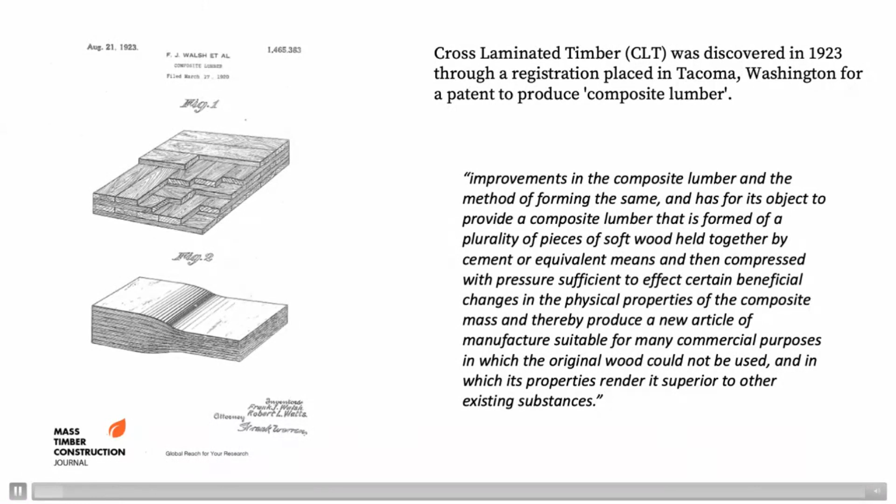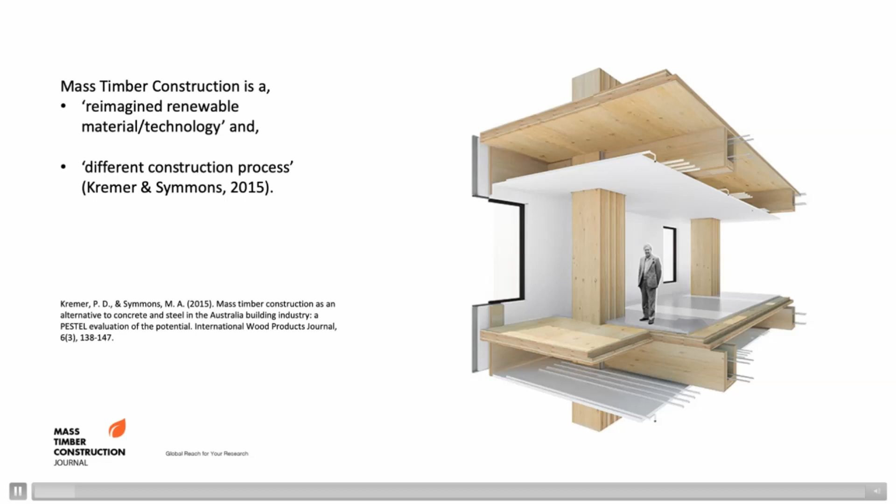More recently, we've moved away from being purist in our designs to hybrid systems. However, the genesis of mass timber is really around this renewable timber technology that then has this prefabricated process that wraps around it. And that's some of the great utility within the solution itself.

So there's three important numbers I want you to understand. They are 39, 28, and 11. And that is because building and construction is responsible for 39% of the carbon emissions around the world, with 28% of that being operational emissions. The remaining 11 comes from embodied carbon emissions. That's the carbon used in the production of the materials, construction, processing materials, concrete, steel, even mass timber products throughout the whole building life cycle.

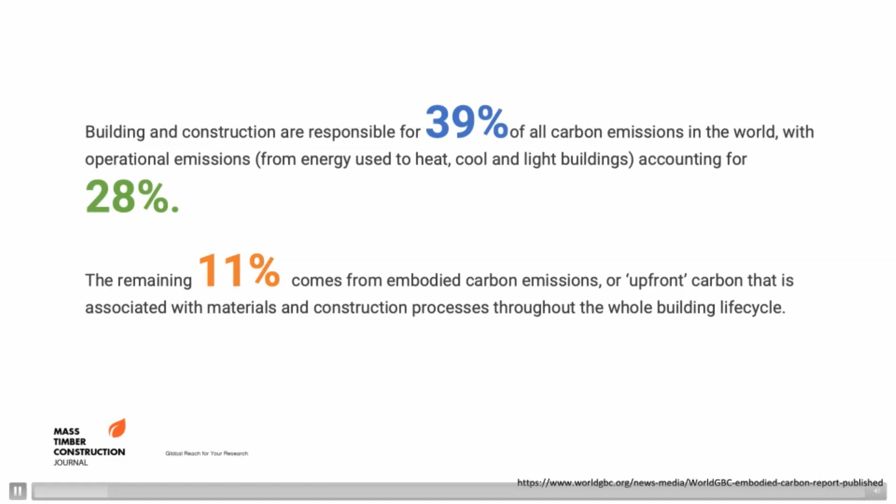And so really what we're trying to do is meet those COP26 and COP27 targets that are in accord with the Paris Accord. Everyone's committing, governments are committing around the world to try and get a more sustainable way to produce buildings. And so we see mass timber as being a great virtue product for that.

The other really cool thing is that we don't necessarily have to see mass timber replacing concrete and steel, but if you do, there's a really great carbon equation. And that is that for every cubic meter of concrete, you have a cubic meter of timber, and as part of that, you actually then have 1 tonne of CO2 that is saved as well. So this is because timber sequesters carbon when it's a tree, a plant, and it's growing, and it stores it within the timber. And so therefore we have this natural storage system.

And the carbon storage, I guess, continues because when we add in place the process that wraps around it, and we look at things like the traditional design and construction processes, we see this picture, and that is really around a difference in the way that we produce. You'll see on the top line here, the design is sort of 50-50, maybe a little bit more. In the traditional sense, that's upfront design. Of course, in traditional construction, design goes all the way through, almost to the very end of the construction process, as architects come on site and continue to evolve and change and work with engineers, and the building and structure through an in situ build can alter over time.

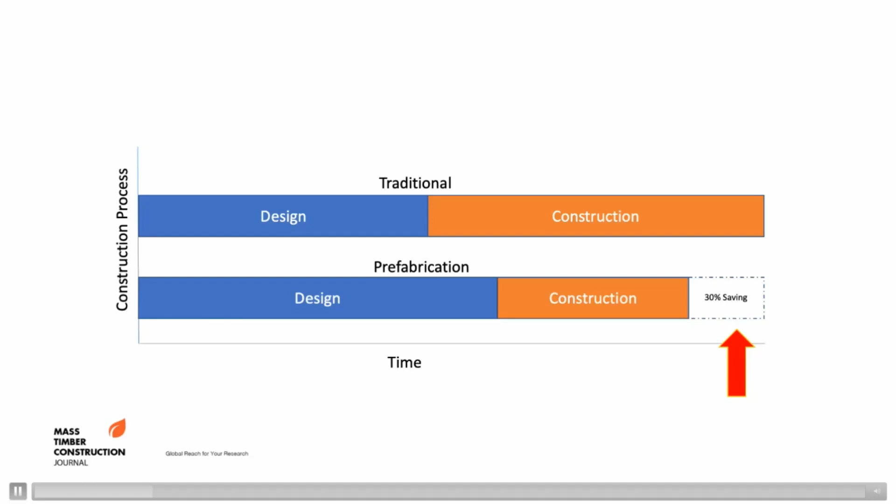So an iterative process creates knowledge. The knowledge translates into the savings. So what does it all mean? Well, if you're sitting there and you're thinking, well, why would I use mass timber? Well, one very compelling reason is that when we do the numbers and we have a QS who has a really good understanding about what's going on with cross-laminated timber buildings versus concrete construction, you can actually see the differentials

here. So these are live projects that were done in Australia, and you can see that there's a total cost for the project in the very bottom line, and you can see that the cross-laminated timber building costs 4.4 million in Australian dollars. The concrete equivalent was 4.6 million, and the minus 6% differential saving was actually in things like adjusting the columns. We didn't need to have the same material substitution. We could adjust the columns and make that work.

The other thing that was really interesting in here is that whilst there was an addition for most of the other things like the floors, the stairs, the roofs, etc., when you add back the preliminaries, which is actually the time difference savings, you put back in 287,000 Australian dollars, you then get to see that there's this positive differential to the mass timber. So without the prefabricated process, mass timber does not necessarily stack up on a material compared to material basis. So do not base it on that. Base your assessment on feasibility based on the total project cost and what it would have been if it was in more traditional materials.

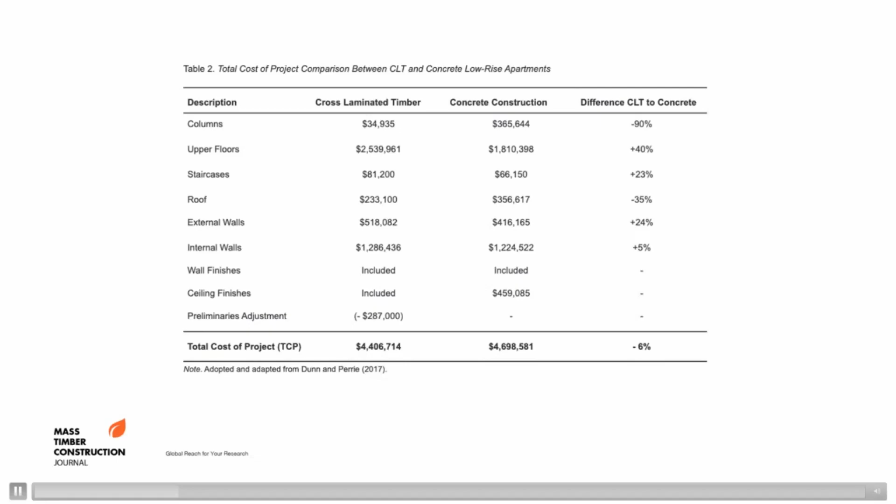What about digital solutions? So if we want to get this mythical 30% and we want to make sure that that's a truism, then how do we use digital technology? Well, this is one of the biggest challenges, and it's actually been met quite strongly by industry. We have BIM, and BIM is a software or a program, or it's a model. However, BIM can also stand for Building Information Management, and information is powerful when it comes to building because it creates certainty. So here is the Catalyst building in Spokane in Washington State, and this is the Katerra job.

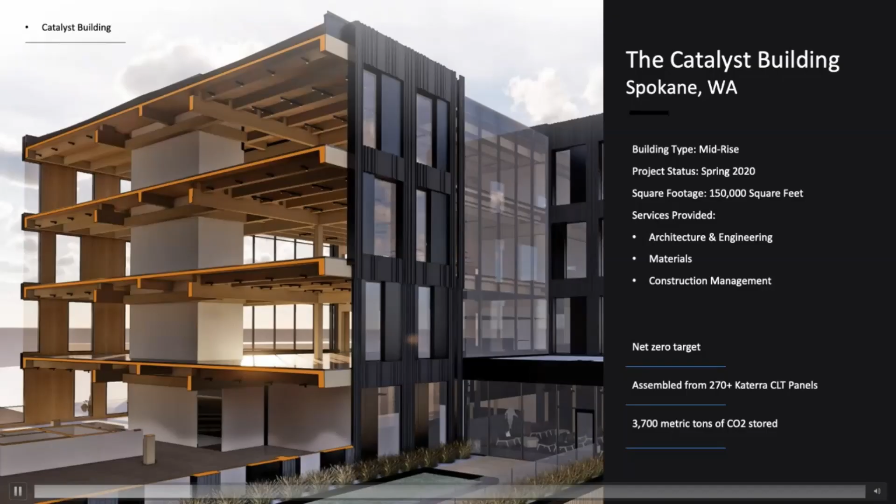3,700 metric tons of CO2 were stored and assembled using Katerra panels. And what's really interesting is that the Revit model and the actual building are remarkably similar. So here's the Revit model, and we've built the building in almost a digital landscape before we've actually constructed it on site. But it's really important to note that it's also this digital building which goes into the fabrication of products, which then constitute the building when it gets assembled.

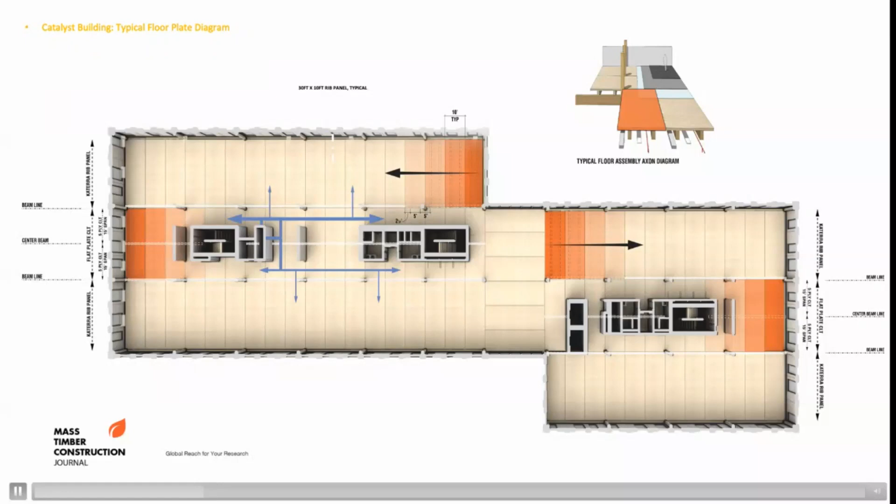And so here you can see the typical floor system. They've actually laid out how the services are going to work. They've looked at the orientation of the panels. They've looked at the width. They've looked at doing what's called panelization, which is mapping out where the panels will go relative to the cores, etc. They've then converted that into effectively shop drawings and construction drawings. So now it's gone from this Revit model from an architectural form, place and space concept to something that can actually be constructed and handed over to a constructor to be able to do that.

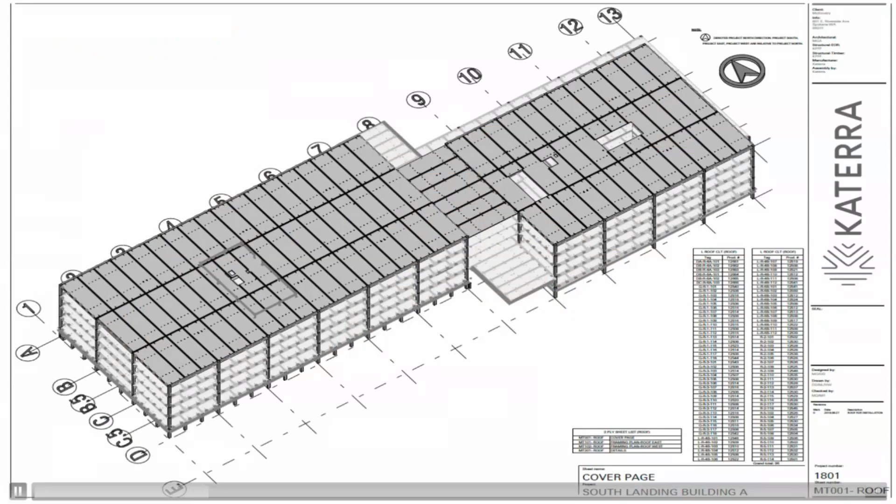Then you have the structural analysis modeling. So here you have all your beams and columns and your intermediates all being put into the model to make sure that the forces and stresses and loads, etc., on the building are analysed and the sequence again is considered. Then you overlay the panels on top of that and add the facade elements. And you can see on the roof structure, there's a services amenities section that's being built as well to probably house air conditioning and other systems that might sit on the top of the mechanical services for the building.

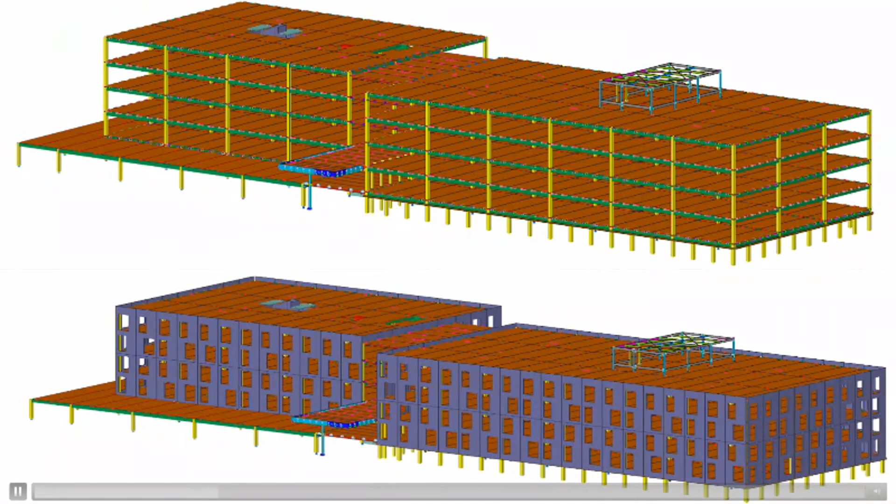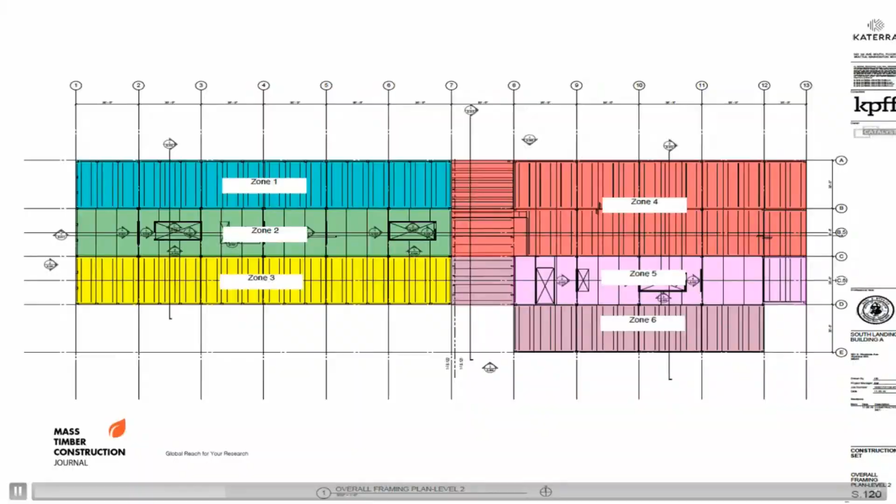They then went and worked out, well, what are the zones going to be? How are we going to deliver it? How much can a truck actually bring to site? And how much can we relatively expect to do in a day? And so these are those drawings. These are given to the constructors to be able to say, this is what we're going to do. This is when you're going to receive things. This is the sequence in which you're going to receive them. And then the final building finally gets built. As you can see here, some very large glue laminated beam systems, ribbed floor system as well with CLT panels sitting on top of it.

And you'll actually notice if you look down on the first picture, the larger picture on your screen, that there's actually been used light gauge steel framing. Now, one of the advents that's sort of occurred when we've moved away from being purist in the way that we use mass timber products is towards a hybridization and the use of steel systems, or it could be a light gauge steel or a timber framing. They will actually save you money and actually reduce weight as well. So you can use a mix of materials.

Primarily, mass timber is used as the superstructure. It's on the critical path. You need to make sure that that's in place because everything else that follows from that is dependent upon that structure being available to everybody.

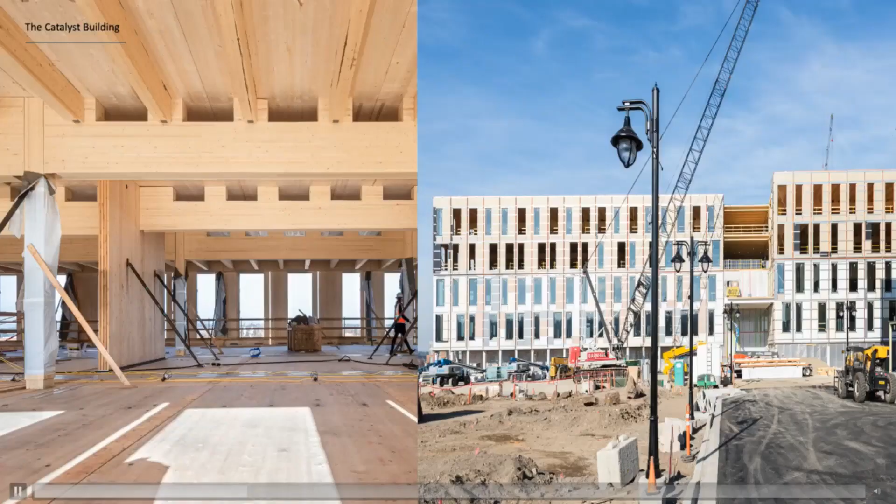Here you can see the facade in, and again, the facade's actually got mass timber elements to it, the external wall with the windows inserted in it, and it is a very, very impressive looking project. And here's some more construction photos, and you can see the facade from the outside. And the building goes up pretty quick. It's assembled in a fairly quick amount of time, and it is a wonderful looking material as well as an architectural design.

So the other problem that mass timber can be very, very useful in supporting is not only this carbon story and this great prefabrication story and this great software and digital twin story, but is the story of urban densification. It is the challenge to try and overcome the amount of populace that's sitting within our cities, and it's continuing to grow.

It's not abating. In many modern cities, people work in the central business districts. They frequent the cities. There's a vibrancy there. It's a desirable and affable place to live, and it is becoming a real concern as to how we're going to fit everybody in. Now, in Australia, the land creep where the metropolitan area is expanding in almost centrifugal rings from the center of our CBD further and further out means that the trip into the city now is 50 or 60 kilometers to get in.

And the land pricing is just going through the roof. One of the most expensive places to live is actually in Melbourne, my hometown. And I know it's also very similar to New York City, to Manhattan Island. So how do we resolve this? How do we work this intractable position where we've got an increasing desirability to be in these populous areas, to make it affordable and make sure that people can actually have some space to actually live?

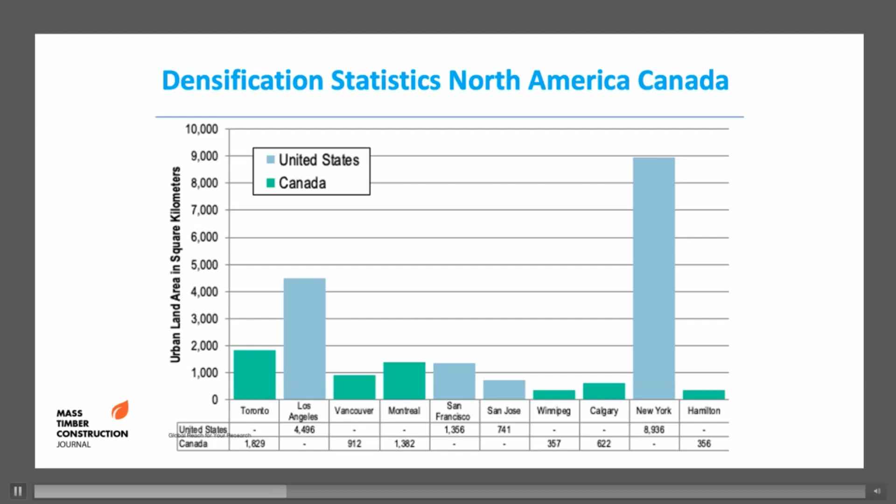Along the railway systems here in Australia, there's a lot of space that's dead, and the small parcels of land are now being used by people that are actually using mass timber products because it has a high frequency density that actually provides some block out for those noises. It's not so good in the lower frequencies, lower hertz range. However, there's sound deadening and protection systems that are being applied to mass timber buildings in these urban infill land areas that allow a building to be built within meters of a railway system.

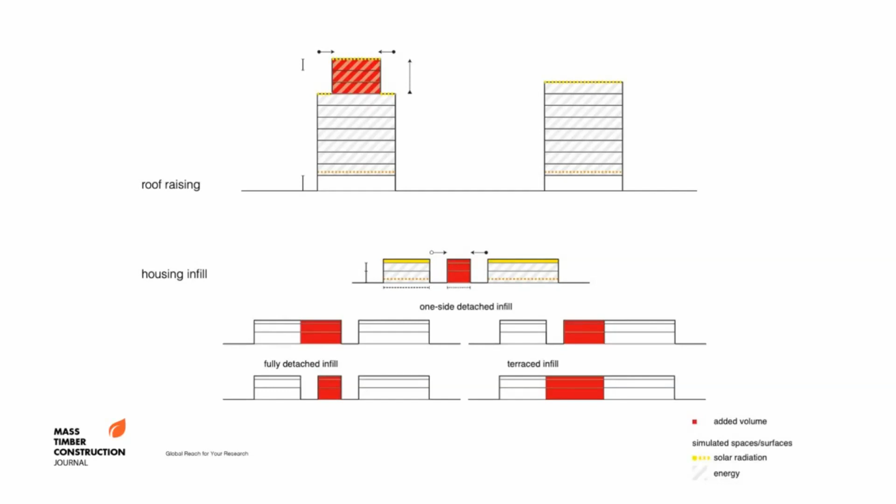Then you also have this, a block of land with a house on it, and we're splitting the land so that it actually now has a capacity for another occupancy for the same land space. And those parcels of land which can be split and have another fully detached or semi-detached building alongside it are very, very popular. They're expensive. They're almost as expensive as a new block where you do not have a neighbor abutting your building, but certainly they start to add value to the existing building structures that are already existing in society and how we address this issue of urban densification.

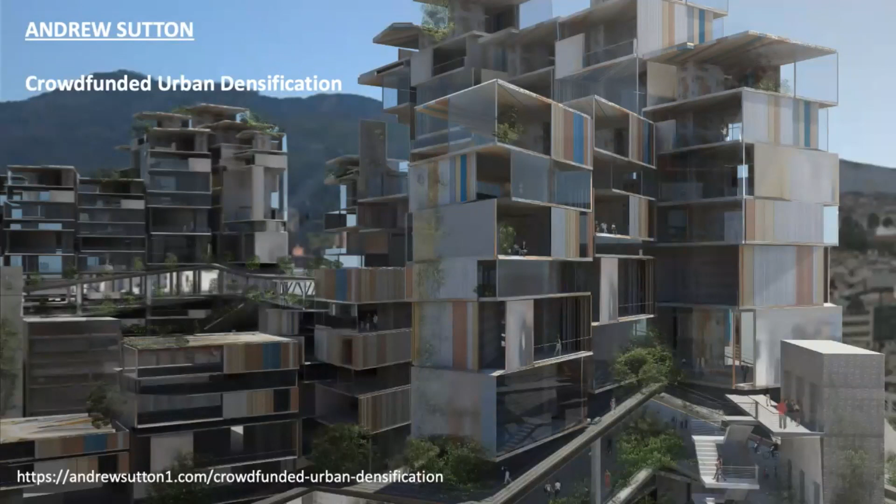So Andrew Sutton has decided that he is going to do something about this problem, and he started up this crowd-funded urban densification project. You can see the URL there. If you'd like to take a screenshot, you can go and have a look at Andrew's work. It's quite a remarkable feat. And I want to just explore the concepts a little bit further before we move into something further in the presentation. So it is effectively about these walkways and structures which then can supply greater housing opportunities for people that live in highly densified areas.

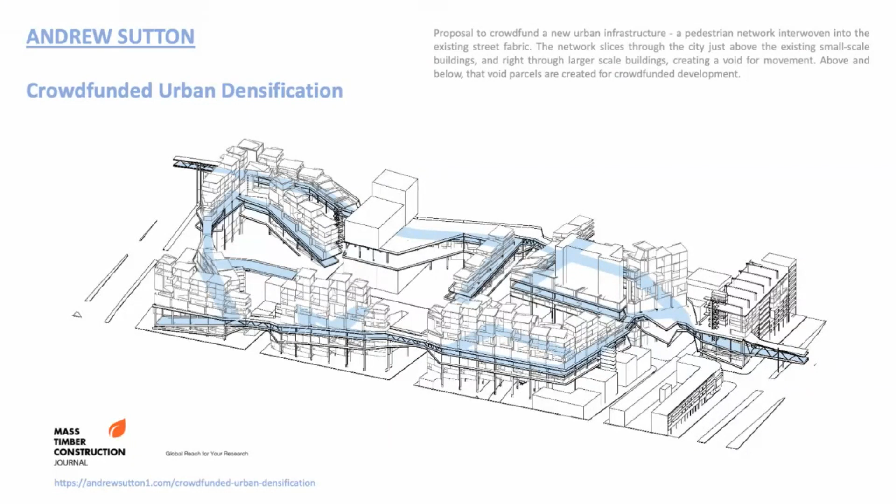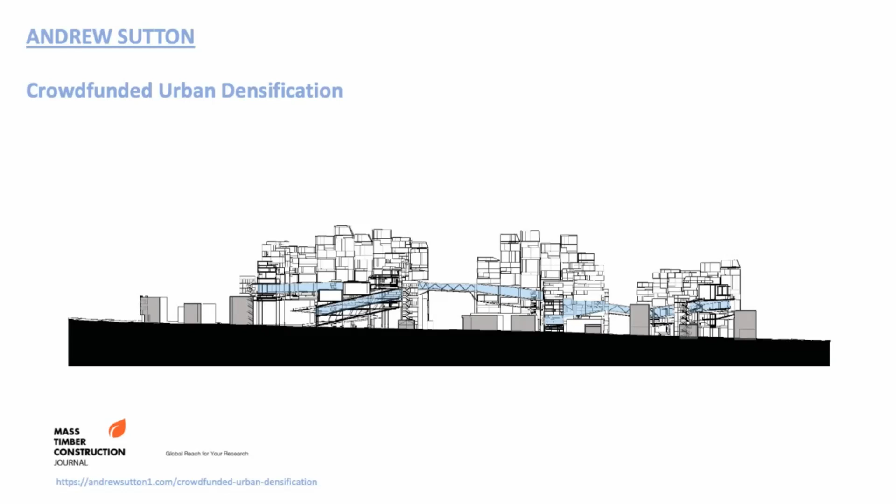And here's one of the densification solutions. This is a community, and the proposal is to have a pedestrian network that's woven into the existing fabric of the cityscape. And it then allows for space to be provided either above or below or beside this walkway. They're creating these voids, and these voids can then be crowd-funded, developed. So then more people can actually take an opportunity to work in these cities. And it's quite an amazing combination of working on top of existing infrastructure, working beside existing infrastructure, but creating a sense of community and flow through the project.

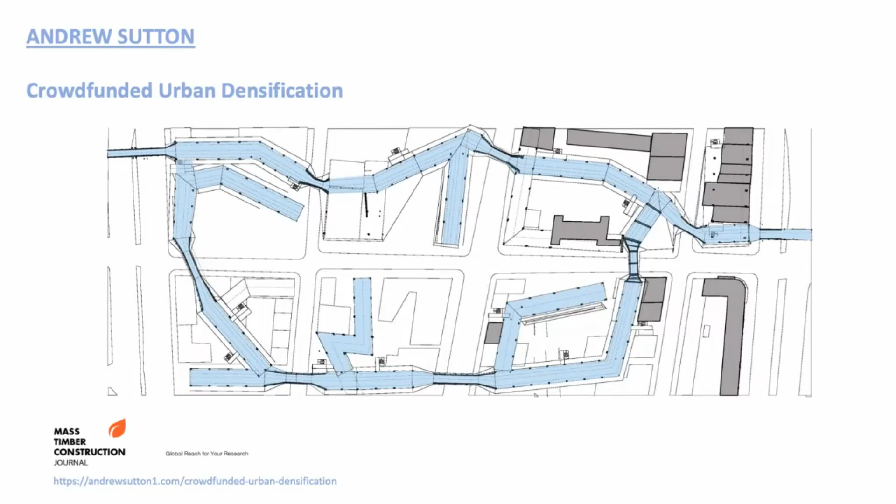And here you can see the aerial view for it looking down on the plan. You can see it actually covers many blocks within this particular city, and the walkways are quite large. So they're creating these sort of places and spaces for people to engage and interact and really try and find some commonality in the way that the community comes together and flows, and resolving the urban densification problem.

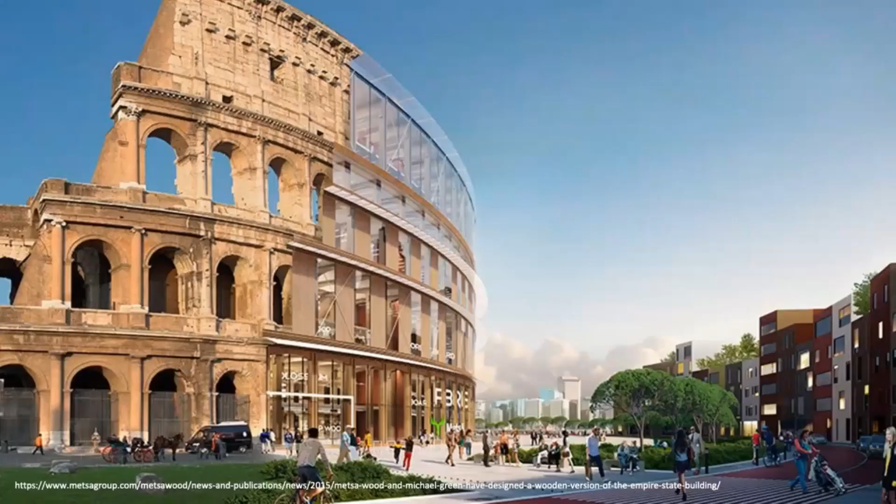Some of the more innovative ways was to actually take the Colosseum and give it a facade and wrap it around. This was a very, very innovative use of a timber system to really promote the Plan B Metsä Wood competition. If you look very carefully on the bottom level of the Colosseum, you'll see the Metsä Wood green logo. Very, very great ideation to be able to come up with this concept by wrapping the Colosseum. Great artsmanship as well from the person that did the graphic design.

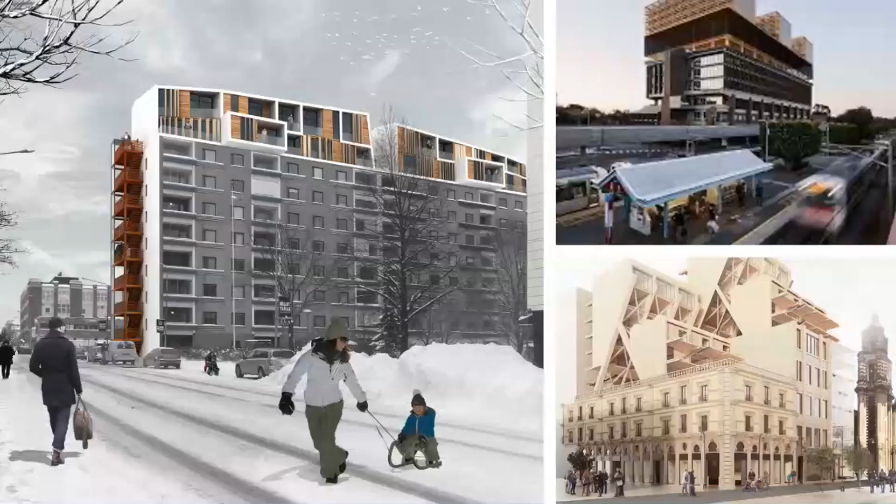And some of the entrants actually did something very similar to those previous buildings we saw that weren't necessarily using timber, but using more traditional methods. Here you can see, looks like there's an apartment block and they've extended on top of that using timber to get 2.5 stories, or two stories, 1.5 stories on top of the existing building using timber.

The one over the rail line is quite important. This is actually something that will happen. There will be buildings built above transit systems and using timber to go above that. It's happening in airports above car parks already. So this is a trend that's growing.

And the one in the very bottom corner that's a very creamy color, you can see it's quite a monolithic structure. It's quite ominous, and it bridges across two projects. And this particular project was quite an inspirational part of the research that's just recently been undertaken by the team and myself that we'll be talking about very, very soon.

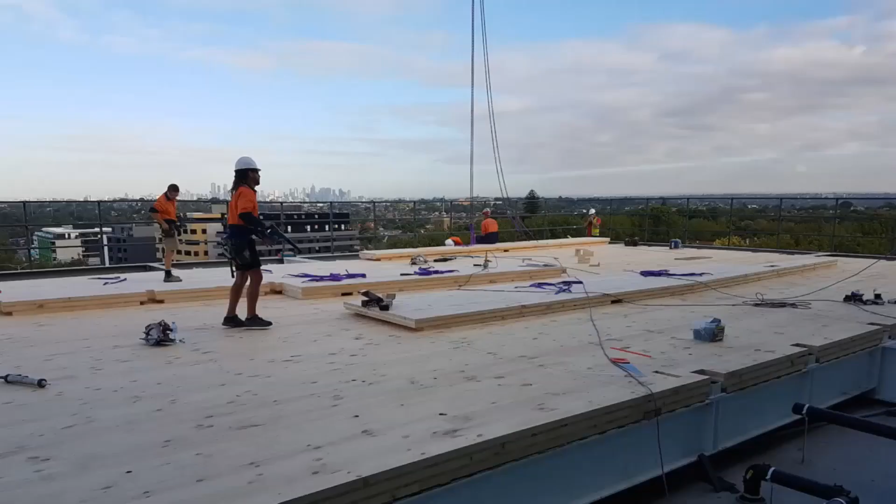And certainly in Australia, the first vertical extended building was this particular building. In the distance, you can see Melbourne City. This particular building that we're standing on top of now in the image is actually Monash University, a university I'm currently an academic at. This is on top of the business and economics building in a place called Caulfield in Melbourne in Australia.

And as you can see here, there's a very strong steel transition structure being built. And on top of that are CLT panels. Those CLT panels are some of the first panels to be assembled in a project in Australia for locally made CLT product. And the building itself is about 9 or 10 stories tall.

And what we're extending on here, the first project we extended on, was a 3-story project, 1 story plus a double height void area for like a lecture theatre. And there's a stairwell or a column system that goes all the way up to the very top. And you can see it here in this particular shot.

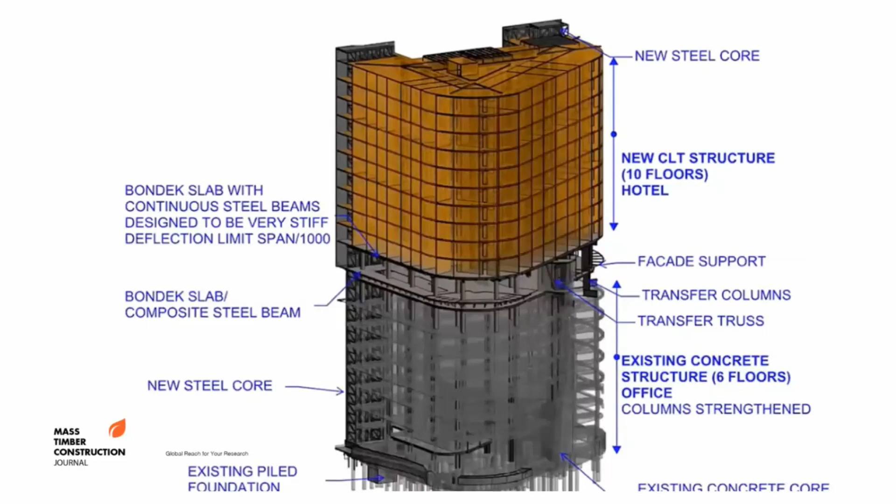The cranes were put into place and needed to get full coverage of the building to be able to assemble the panels. The panels were created in a model, and then they were sent to Europe. The panels were then produced in Europe, containered back to Australia and assembled. Again, the roof structure was done locally.

Hi, everyone. I know the video just stopped, so I'm trying to figure out if, I don't think it's over, but it did seem to snag. No, it's certainly not over, but if you want to put the slides up, I can finish the rest of the presentation if you want. I'm up now. Dr. Kremer, you're on. Yeah, if you'd like to put the slides up, please. Yeah, that'd be great.

Apologies, everybody. But we'll take off where we were before. I think I'm back, I can hear you now. I can advance slides if you like. It's up to you. No, it's okay. I just had it from the slide that I wanted to go from, but I actually then just skipped through, which was very, very silly, and said play from the start. So I want to play from current slides. So I'll be fine. Thank you.

Here we go. So 80 M Street, you're probably maybe familiar with this. It's in Washington, DC. And it is a vertical extension on the old WeWork building. And that was really important because I think during COVID times and a few concerns with WeWork were allowing this building to actually happen. So Hickok Cole with the architects and a great team that were behind this. And they looked at many massing models to try and work out how they were going to create this particular space and get the most utilization out of the particular building.

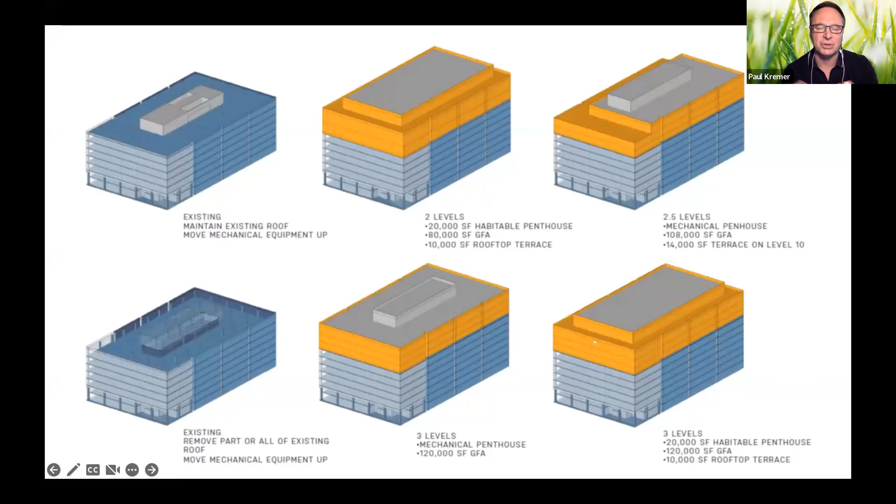And they chose to use an offset penthouse. So 2 stories plus a penthouse, slightly offset, which allowed for the canopy structure to go in the front of the building, as you saw from the render. The really interesting thing here, though, was because there were issues potentially with trying to get code compliance and testing systems, they extended the central core of the existing building up into the new space. And this provided an opportunity that as soon as you walked out of the CLT or mass timber floor areas into the new core system, it would actually just be traditional systems that are available in any building that have been certified and are under regulation.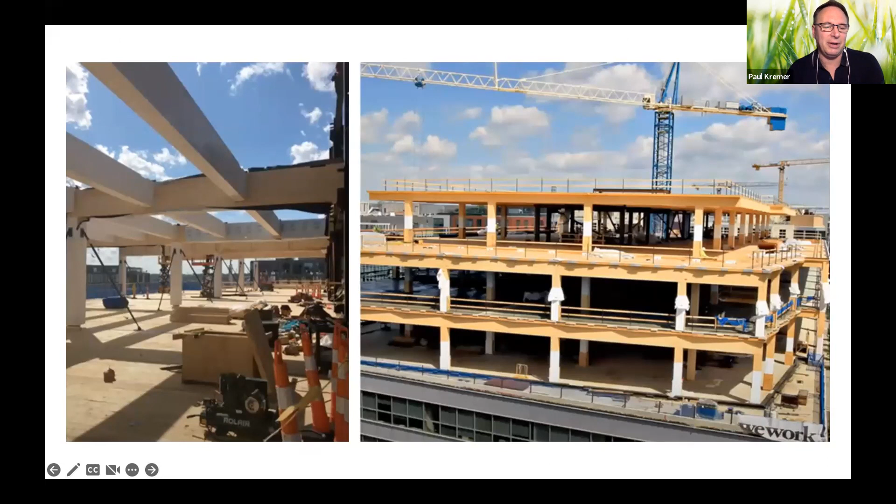Sorry, Jeff Spiritos, I don't have any images of your extension, but next time, please do let me know and I can chuck them in.

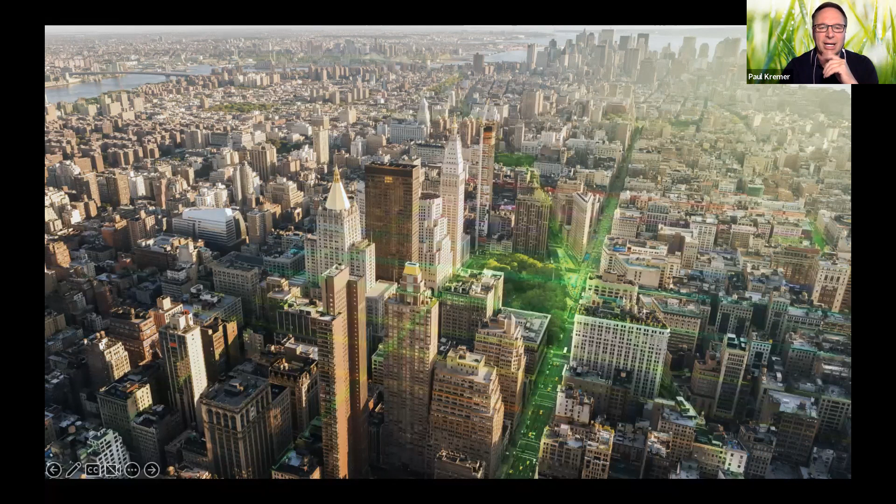But that's all one building on top of another building. And we looked at Andrew Sutton's work around connectedness. And so what about building cities that combine and connect with each other? So we met the challenge of trying to work out how do we put communities above the cities, not just people living in a building or working in a building and it's an extension building. We wanted to try and create a different approach, a more sustainable approach to planning.

So the Melbourne Mallee is the project. Mallee is actually an Indigenous term, and I'll explain what it means very soon. But the project was funded through CTBUH and partners, and Deakin University, which was the university I decided I'd be affiliated with in this particular project, as opposed to the other affiliations I had. We undertook the 2020 seed funding. We got this particular project across the line and we've been working on it. We had disruptions through COVID. We had people that moved from Australia back to the United States and the project team, and it took a little bit longer, but we were really pleased with the outputs.

The project team is here. You can see all walks of life. We have engineers, modelers, we have academics, we have people in the industry, all coming together to try and work out exactly how we're going to resolve this problem of communities on our cities.

But importantly, we had to think about the problem from a number of factors or domains, and some of those factors and domains exist here. The first group of factors and domains were really about the city and the country itself. So what does the particular country or city view in terms of the stock it holds currently that might have the capacity to have a vertical extension on top of it or an overbuild, and the distance between those buildings.

So it's the distance within the city block and potentially between city blocks, the height differential between the existing buildings that you select in the sort of pool or population or sample that you pull out of that particular city, access to that building. The 55 South Bank and WeWork buildings had sort of space around them to be able to maneuver. Is that always going to be the case, or will there be barely meters between the buildings with a small laneway running through?

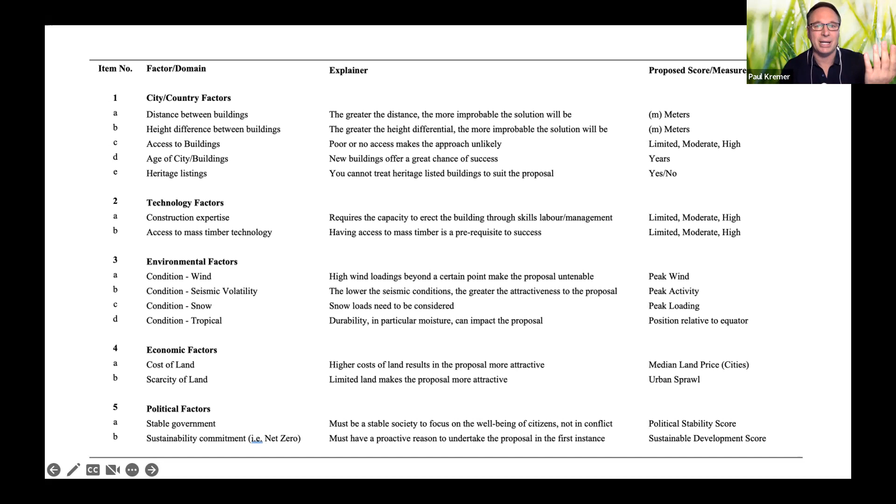And then the last one was the sustainability commitment. The Conference of Parties 26 and 27 really created a genesis where governments around the world are meeting or trying to commit to and meet those Paris Accord targets for CO2 emissions and the reduction. And so mass timber then becomes a very good utility to support that particular endeavour. And that's why we looked at these domains. So we didn't do it in isolation. We actually had some good thought.

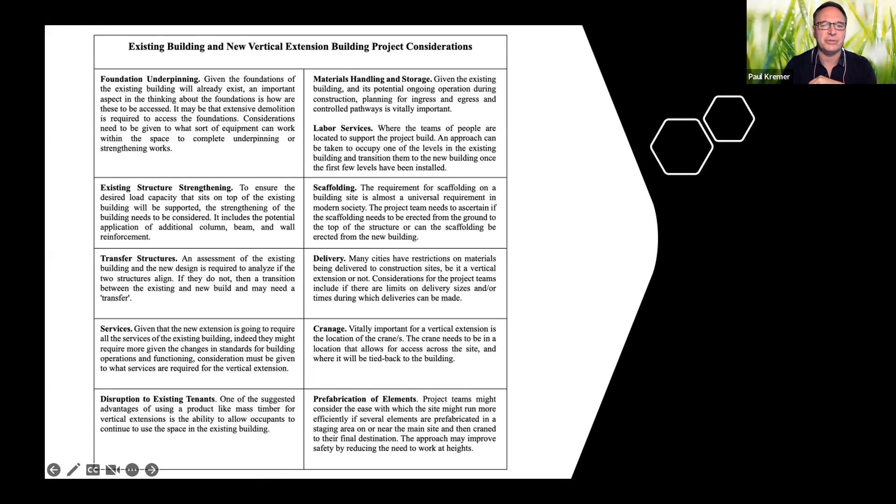I'm not going to read all of these, but these are the considerations for the existing building and the new build, certainly underpinning for the foundations, existing structure strengthening, transfer structure services, and the disruption to the existing tenants. In the 55 South Bank project, the tenants stayed in the project. It wasn't always rosy. They did make complaints at times. However, they did stay. All the other factors on the other column really relate to what happens on a new build anywhere. But the main one is really about how you're going to get deliveries, how you're going to get prefabricated elements to site. And we needed to think about all of those in totality when selecting buildings for our concept that we came up with.

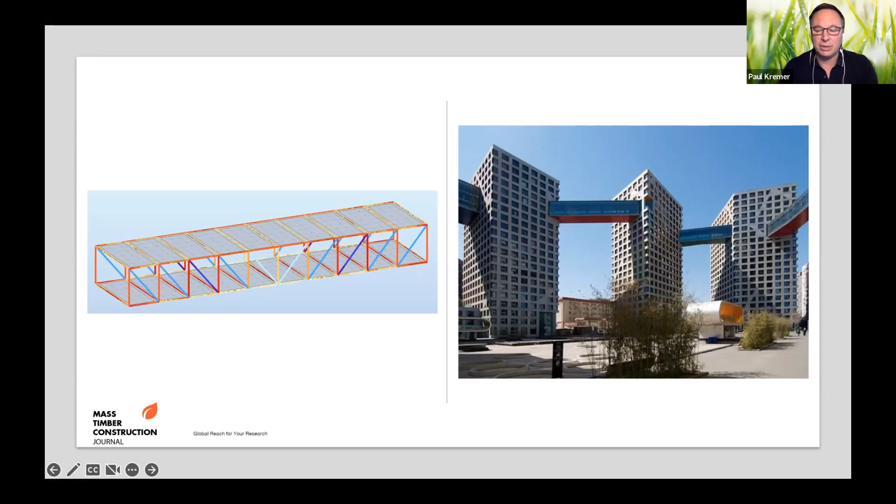The other thing was to work out, well, what are our bridging systems going to look like? So we actually designed a bridging system. We actually looked at limitations. We engineered the whole system. We didn't engineer it in purest mass timber. It was not possible to do so at the spanning distance. So we used a hybrid approach, and we certainly took from the expertise from existing projects like the one that's pictured and how that would work specifically at height. And we were able to come up with some engineering schematics. And we basically mocked up or started to concept design what structures might look like.

Here you see two grey buildings, existing buildings of differential height, and you have this transfer system on the timber tower that's 10 stories tall. So that pretty much mimics what's happening at 55 South Bank. We already had Nick Hewson, who was the engineer on that project, on this project team. So we already had the engineer that could tell us exactly how to build a 10-story building on an existing building because we'd already done it.

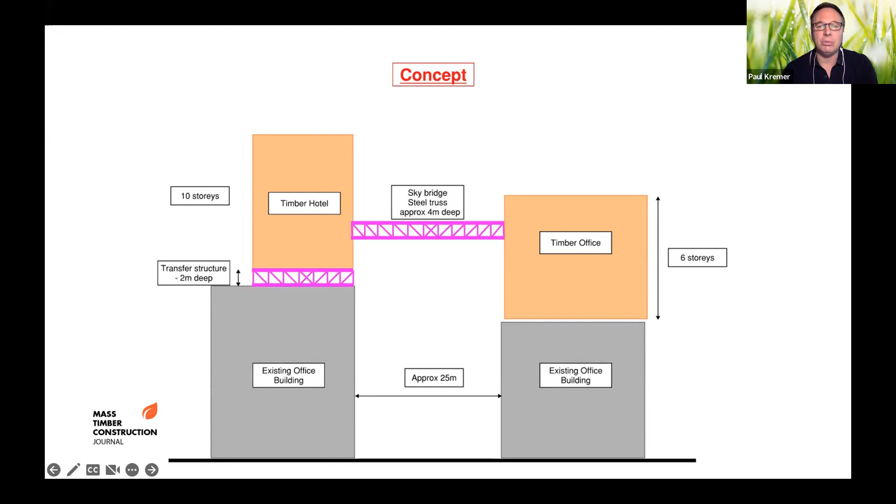We then had the sky bridge going between these two structures to the other existing office building, where we have an extension of that existing office building with a timber office building. And so now you can start to see that this concept starts to take shape. And we actually were able to model this and make sure that it was a feasible concept.

So Melbourne Mallee actually is a group of eucalyptus trees. It's an Indigenous Australian term, which means to have a cluster of trees. And the trees actually provide to the ground area sort of 30 to 70% shade for the Indigenous communities to come and rest under during the day, or to make camp. And so this sense of community around this gathering of trees was really one of the inspirations.

Now, I have to give credit here to Professor James Doffler, who was on loan to us from the United States, that worked as a professor of architecture at Deakin University. I believe he's now in Florida or at Auburn University or somewhere around the world. I haven't caught up with him recently, but he came up with this concept in his time in Australia, and it was a great concept fitting this particular proposal.

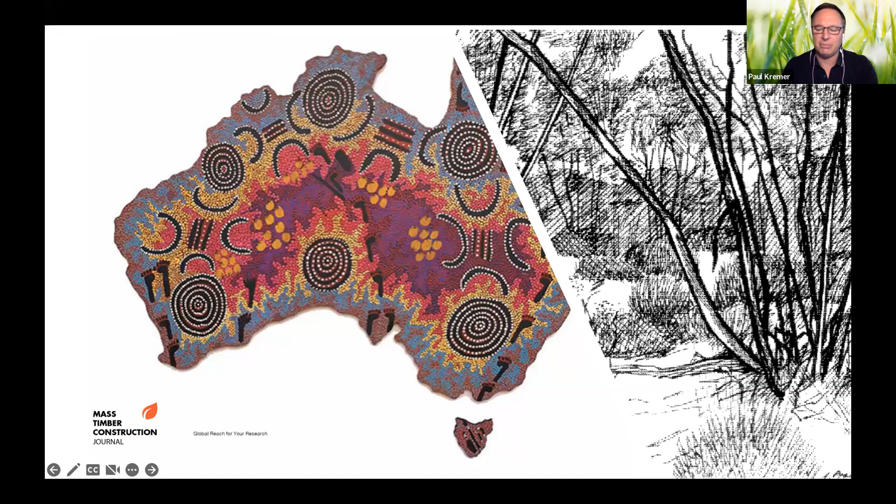And so we set out looking at what it might be to build multiple buildings on top of existing buildings. And we chose Melbourne because it actually meets all of those criteria that we set out to provide on that scorecard that you saw earlier. It also provided us a sensibility to be able to physically go and see the sites to see whether this is a plausible thing that could happen. Of course, we couldn't assess the existing buildings, so we made sure that we had assumptions that met the criteria to come up with a feasibility concept.

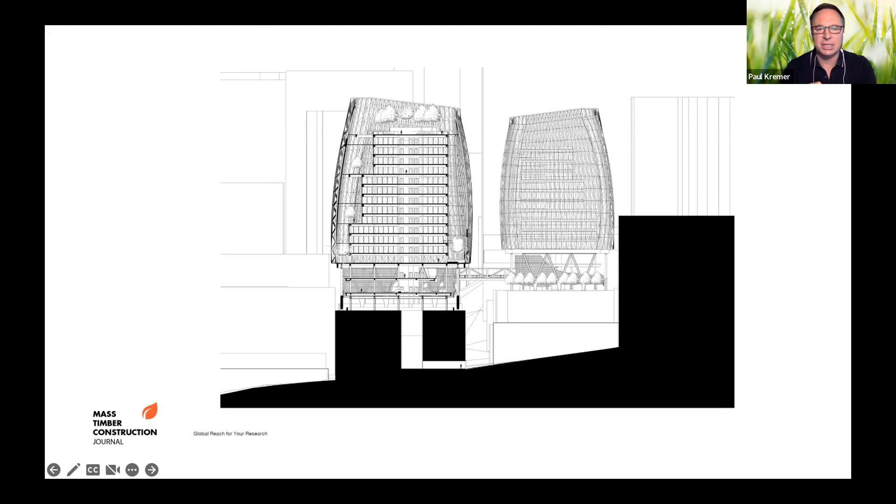And certainly in the detailing of this, you can see that it's quite an ominous structure with three interconnected buildings, all of similar sort of design and shape that somewhat mimic that eucalyptus tree gathering site. And we thought about the spaces that sit beneath these. What are these transfer decks? On 55 South Bank, they put a pool in there and they had their services.

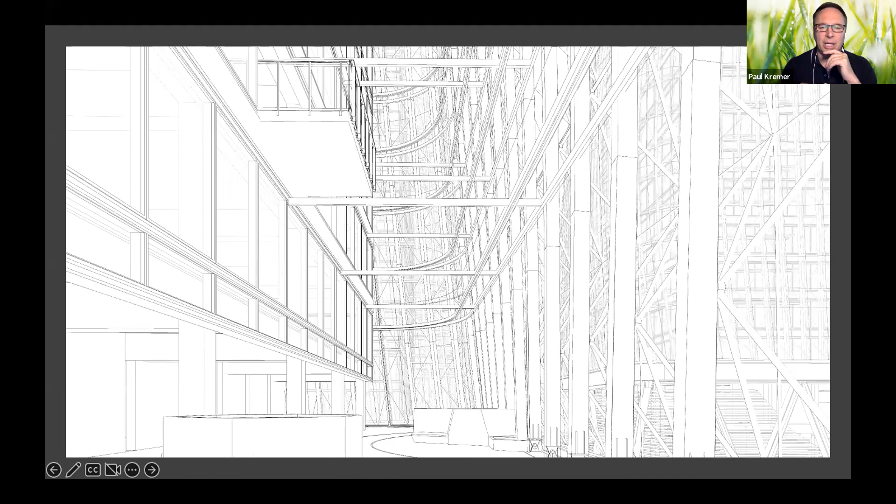Well, we said, why don't we make this concept something more community oriented? And so we created spaces that actually provide this sense of community as you walk in. And between the facade system, this curtain wall system, and this internal building, we had these open spaces for community activity and traffic flow as well.

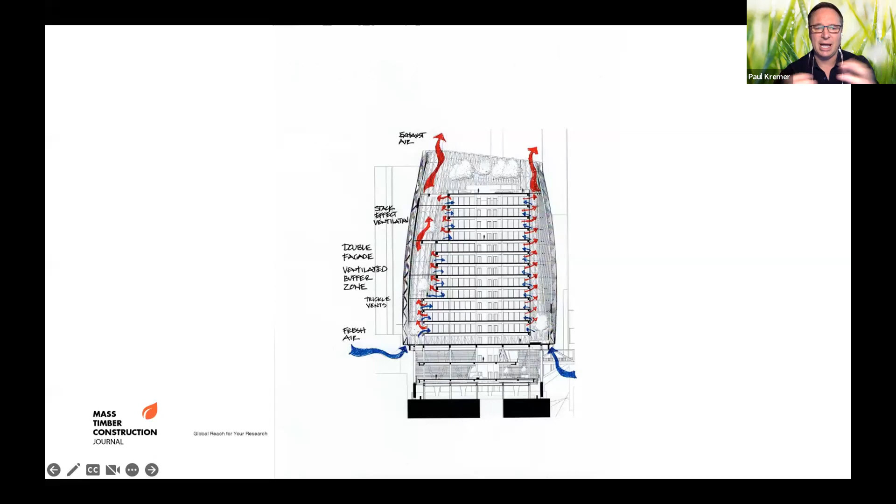We had to consider airflow through the building, so we looked at that. We looked at all these different zones and how that would exchange air inside these particular structures, and how the stacks would flow. And in fact, this is very similar to termite mounds. The airflow in termite mounds is very similar to what you see here with the airflow coming through this proposed building. And we also wanted to look at the forces acting upon it and how that would then protect these, what we called sky gardens.

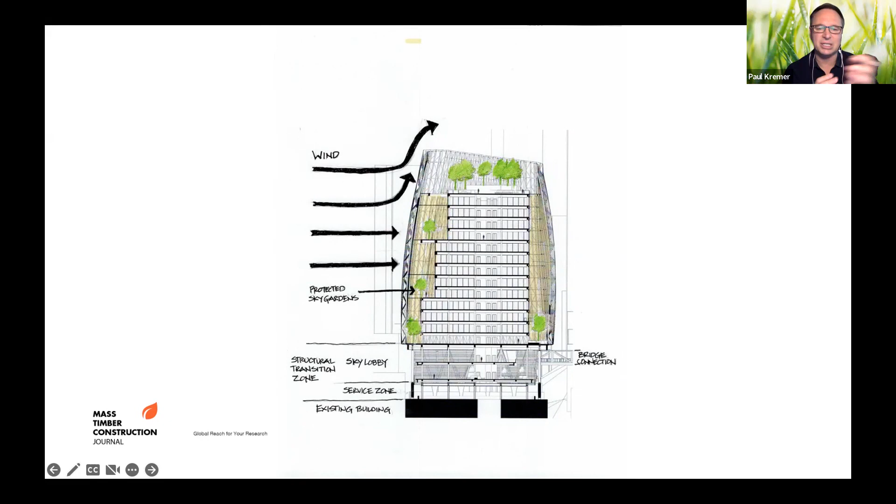And we termed the lobby, which was the transfer space, which we created like large stilt areas, the sky lobby. So we had sky lobbies, we had these bridge connection systems, we have these amazing internal facade systems and these sky gardens all working together in concert with the building structure.

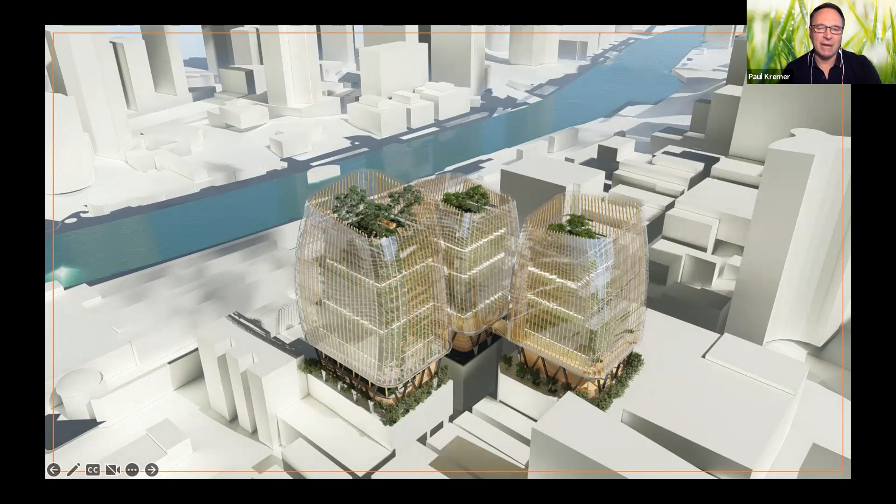And when it's concluded, it sits in the space. Of course, it's fully furnished with its eucalyptus trees sitting out the top in the sort of terrace areas on the very top level. Those terrace areas could also be spaces for people to meet and have communal activities, etc. And yeah, it's a very important concept for us to try and validate this particular concept of how do we build communities at height. And so some more facade shots.

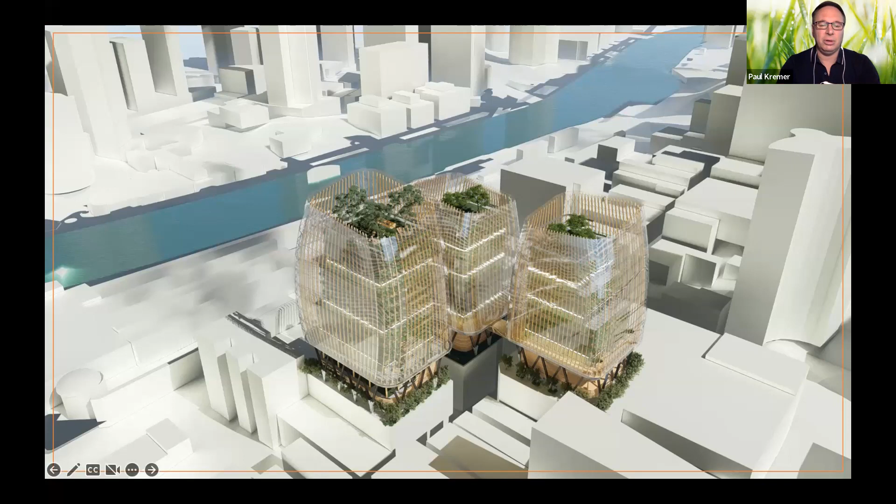The glass curtain wall is sort of transparent to allow a visibility of the structure and the sky gardens within. And you get all these different views, and it's quite a beautiful building. We tried to create a sense of, you know, what could be for the future. And we think that the concept certainly holds weight.

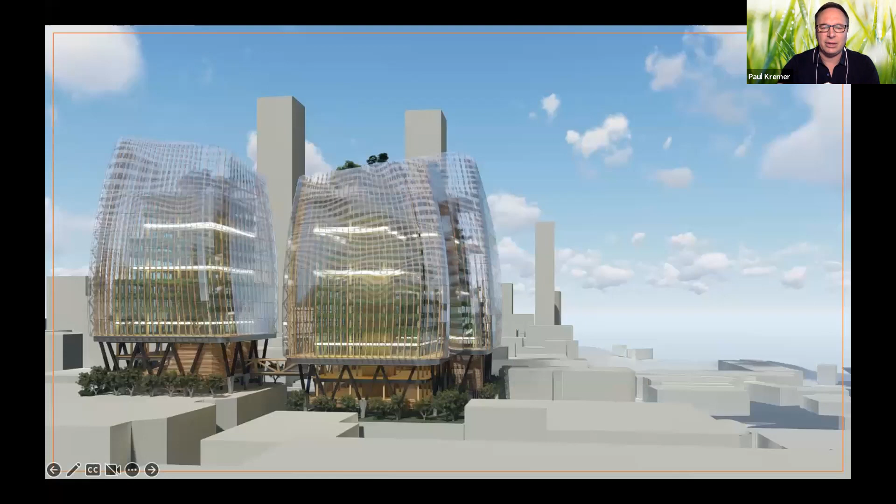The trouble will be trying to get developers that own these disparate buildings to agree to work together in a collaborative sense. But hey, mass timber construction is all about collaboration. So we're trying to work out how we can do that.

And as you can see from the river view here, looking back onto the structure, sitting in the cityscape, it nestles in quite well with the buildings that are around it, which are of a similar height, and they are without vertical extensions. The sky bridges there, you can see, are not necessarily at the upper levels. We wanted to create those community spaces at the base level where there's these transfers from the existing buildings.

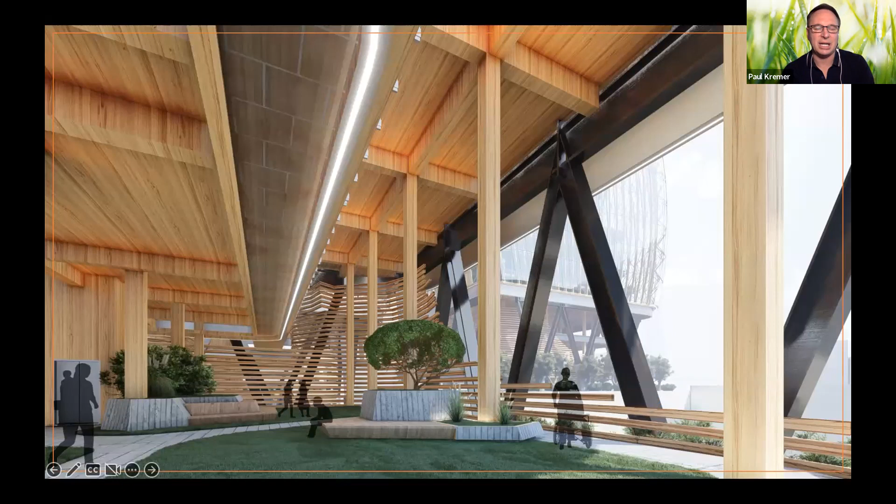But overall, I think the concept holds some water, and we certainly think that at some point in the future, someone will take the inspiration and support a project like this. And as you can see, the underside here, we used a hybrid of materials. We used steel as well as the timber and concrete. We didn't believe that it was a purist CLT project. We had to use a hybridization of materials, which is becoming more and more popular, using the right material in the right place for the right purpose.

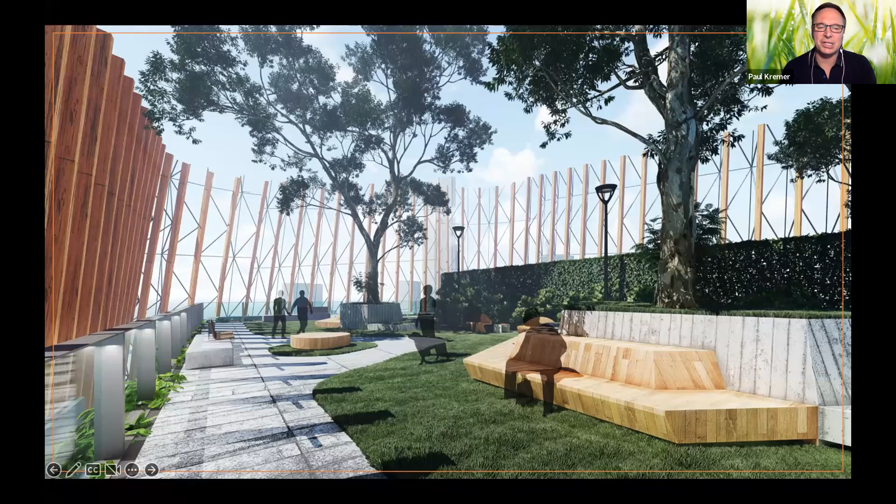However, it's starting to take shape, and here's that sort of sky garden community pathway walk area where it's insulated and isolated in this particular location. And on the very rooftop terrace, you can go up there and enjoy the city views while enjoying some of nature and having greenery on the top of your building, and meet with friends and family and new friends and colleagues and visitors, etc.